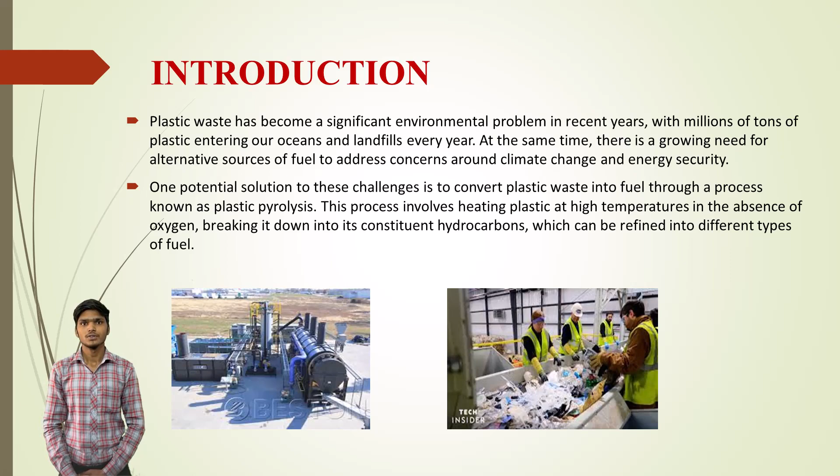Now the question arises: why do we need to convert plastic waste into fuel? The need arises from several factors harmful to the environment. Plastic takes a long time to decompose and occupies significant space in landfills. By converting waste plastic into fuel, we can reduce the amount of plastic waste that ends up in landfills.

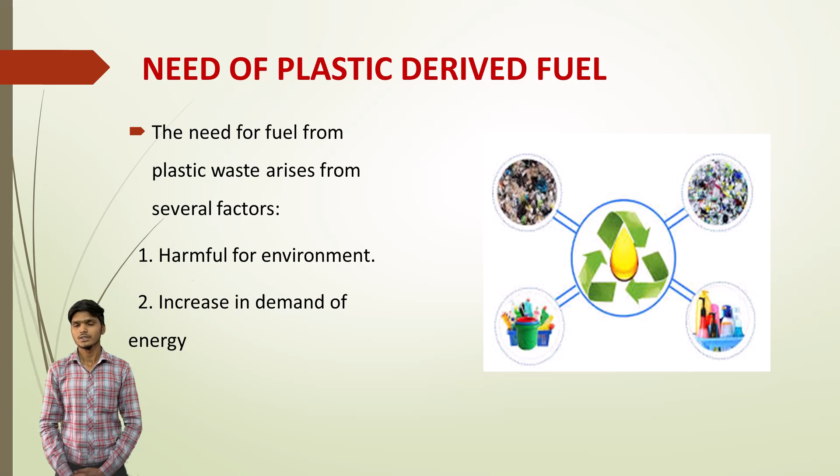Increase in demand of energy: waste plastic contains energy that can be recovered through conversion into fuel. By converting waste plastic into fuel, we can reduce our dependency on non-renewable fossil fuels and generate a source of energy from a waste material.

Classification of suitable plastic for conversion into fuel. Plastics are made up of long-chain hydrocarbons and can be converted into fuel through a process called pyrolysis. However, not all plastics are suitable for conversion into fuel. Generally, plastics that are rich in carbon and hydrogen and have low levels of impurities are the most suitable for fuel production. Here are some plastics commonly used for fuel production: polyethylene, polypropylene, polystyrene, polyvinyl chloride, and polyethylene terephthalate.

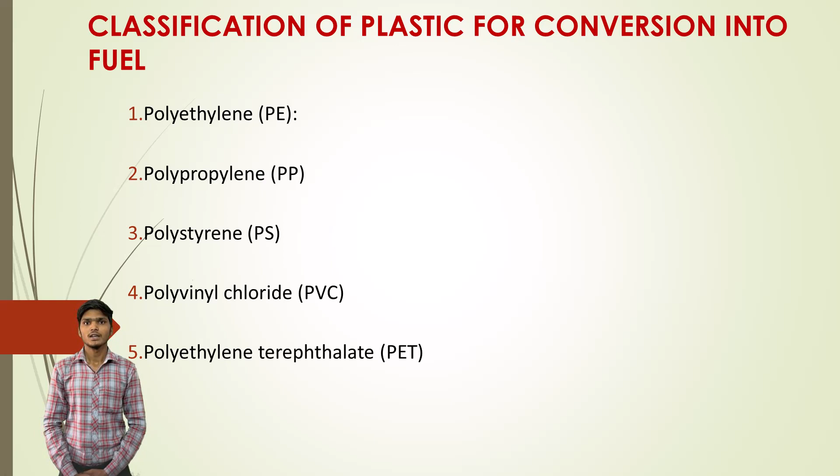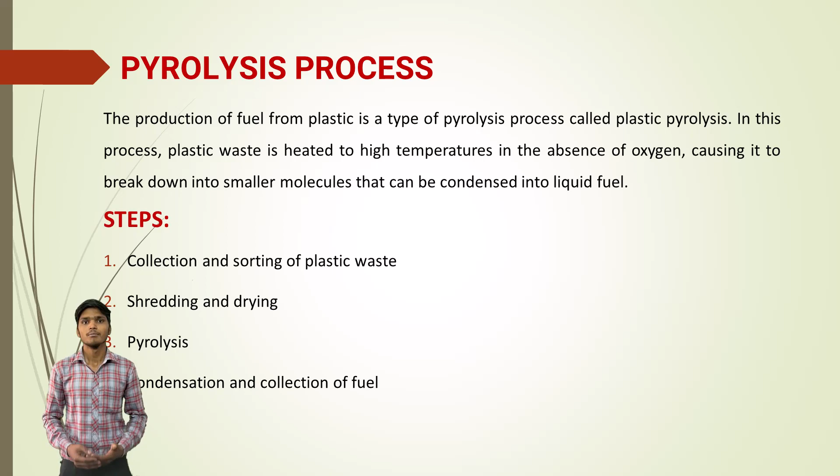Now, the pyrolysis process. The production of fuel from plastic is a type of pyrolysis process called plastic pyrolysis. In this process, plastic waste is heated to high temperature in the absence of oxygen, causing it to break down into smaller molecules that can be condensed into liquid fuel. The steps are: collection and sorting of plastic waste, shredding and drying, pyrolysis, and condensation and collection of fuels.

Pyrolysis reactor: the shredded plastic is fed into the pyrolysis reactor, which is heated to a high temperature of around 400 to 450 degrees Celsius in the absence of oxygen. The heat causes the plastic to break down into smaller molecules. Condensation and collection: the gas and liquid products from the pyrolysis process are cooled and condensed to recover the oil and gas. The gas is collected and can be used to produce carbon black or as a fuel source for energy generation.

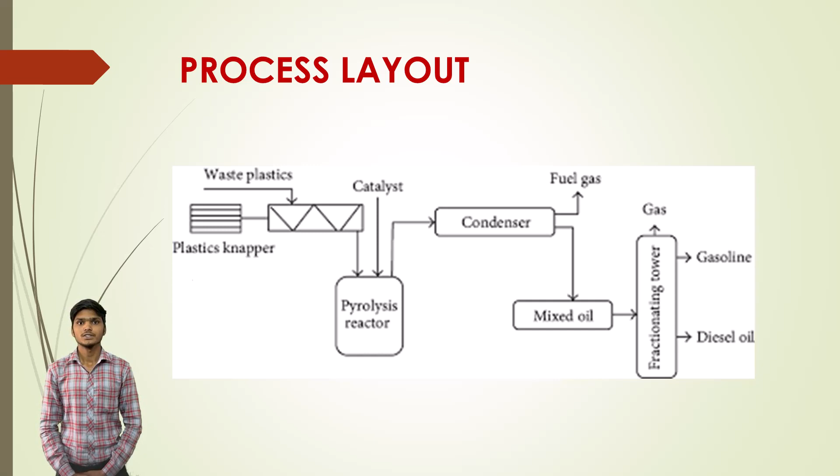Now, the advantages of plastic-derived fuels. Reduction of plastic waste: plastic-derived fuels provide a solution to the problem of plastic waste management. It can convert plastic waste that would otherwise end up in landfills or the environment into a useful resource.

Lower carbon emissions: the use of plastic-derived fuels can result in lower carbon emissions compared to traditional fossil fuels. This is because plastic waste has a lower carbon footprint than fossil fuels, and the process of pyrolysis produces less carbon emissions than traditional refining processes.

Energy recovery: the production of plastic-derived fuels can generate a significant amount of energy. The fuel can be used in various applications including transportation, heating, and electricity generation. Cost effective: plastic-derived fuel can be produced at relatively low cost compared to traditional fossil fuels, because plastic waste is often readily available and can be sourced at a lower cost than crude oil.

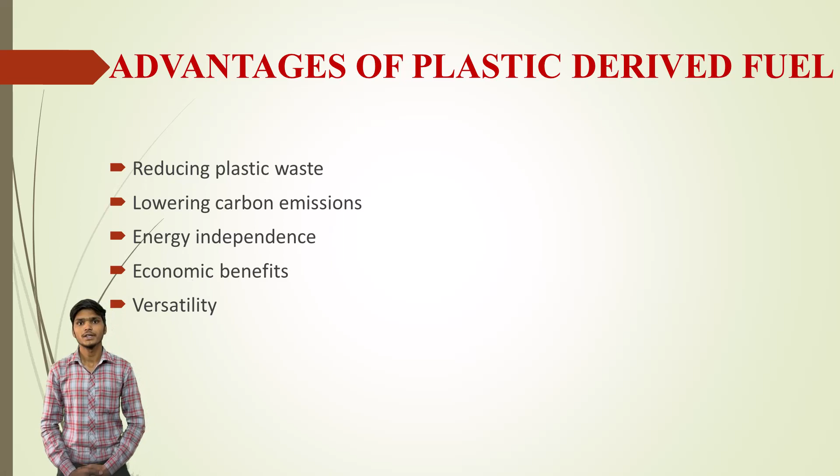Versatility: plastic-derived fuels can be used in a range of applications such as fuels for vehicles, boilers and generators. It can also be blended with other fuels to improve properties such as octane rating and viscosity. Now some limitations: it is an energy consuming process, and plastic-derived fuels have low calorific value and high viscosity.

Future scope: the future scope of plastic pyrolysis is promising as it offers a sustainable solution for managing plastic waste while also providing a valuable resource for energy production and chemical feedstock. Some potential future developments include: advancement in technology, increased demand for sustainable fuels, expansion of waste management systems, government support and incentives, and development of new applications.

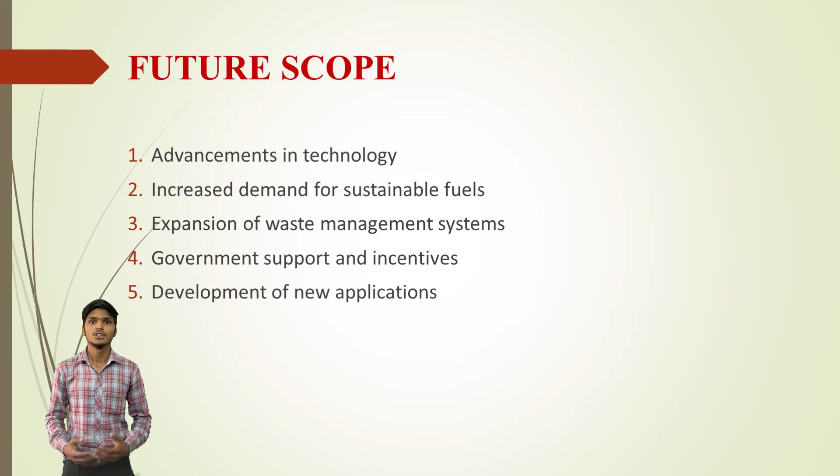This is all about the topic fuel from plastic waste. Thank you.